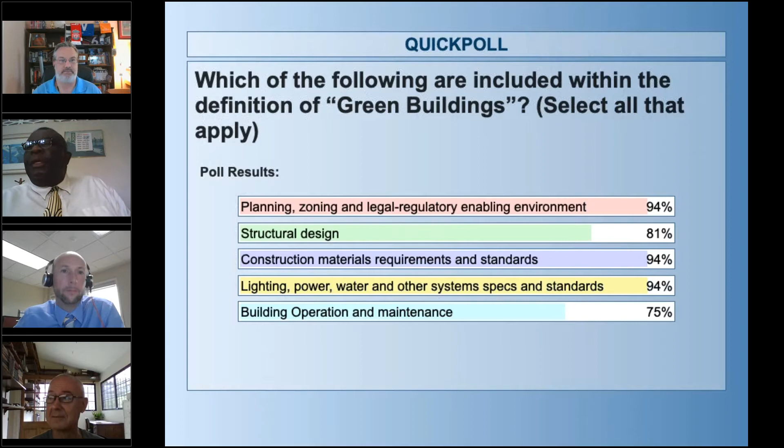Please proceed. From my perspective, I am much more at the operational level in respect to green procurement, so I am concerned with the building systems. In turning to buildings that consume energy, I'm concerned about product safety, how recyclable these products are, what are some of the end-of-life issues, and also very concerned from the perspective of a procurement officer about the concept of value for money on an overall life cycle basis.

Thank you. As I think we're seeing from a number of the speakers, we're looking at an end-to-end concept here, a full life cycle, if you will. I just want to move on to another poll before we move to a little bit more detail from the presenters, who I know are itching to get going.

I'm going to try to launch a second poll to seek some feedback from you, the audience, as to what green building public procurement might look like in your current context. Can you see it? Yes, Doug, I can see it. This is Agnes. Okay, so if I could ask the audience to give us feedback on what areas your public procurement focuses on in terms of green building procurement, if it does at present. We fully recognize that a lot of countries are still moving forward in this particular aspect, which is why this initiative was originally designed.

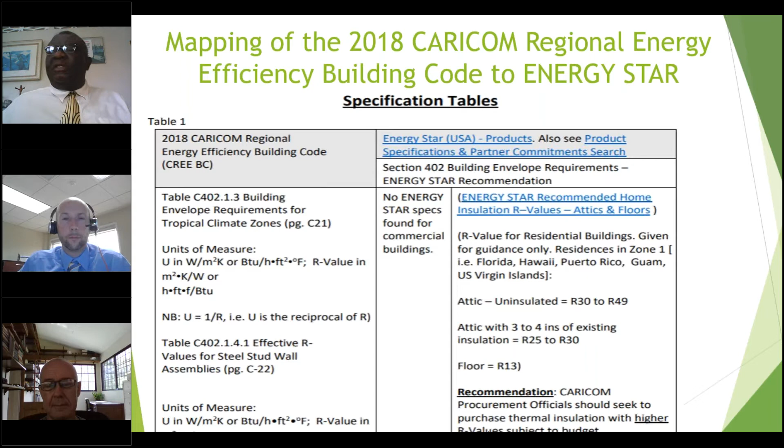In comparing with Energy Star, we found that for building envelope, there are no R-values for the commercial sector, but there are certain R-values—resistance values—for insulated and uninsulated attic spaces. We took the numbers for tropical parts: Florida, Puerto Rico, Hawaii, etc. The manual recommends that procurement officers should always go for higher and higher values, subject to considerations of budget and space.

Here's what the CARICOM Regional Energy Efficiency Building Code looks like. It was prepared by the CARICOM Regional Organization for Standards and Quality, CROSQ, together with the Code Council and ASHRAE, the American Society of Heating, Refrigerating and Air-Conditioning Engineers. After the manual was completed, CROSQ itself issued a label for CARICOM.

Accompanying the manual is a toolkit, the Green Building Procurement Manual Policy and Procedures for Public Managers. There's an overview of the national policies for procurement for 5 CARICOM countries: Antigua and Barbuda, Belize, Grenada, St. Lucia, and St. Vincent and the Grenadines.

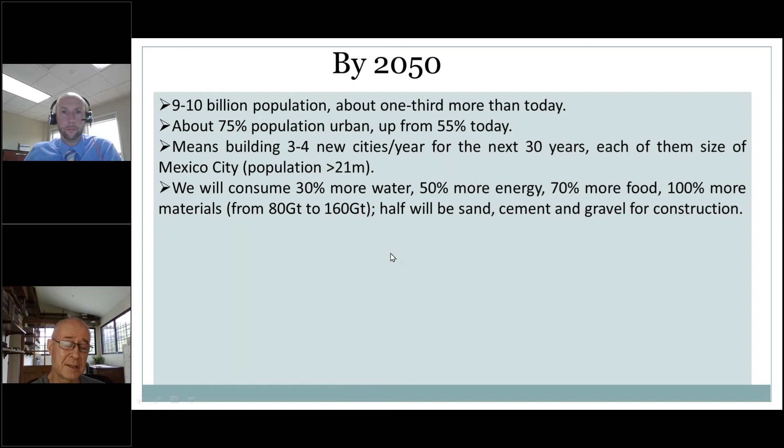As a result, by the time we get to 2050, we're projected to be consuming about 30% more water than we are now, 50% more energy, 70% more food, and 100% more materials. We'll be going up from 80 gigatons of materials a year to closer to 160 gigatons. About half of that increase will be the sand, the cement, the gravel, the steel that we need for all these new buildings.

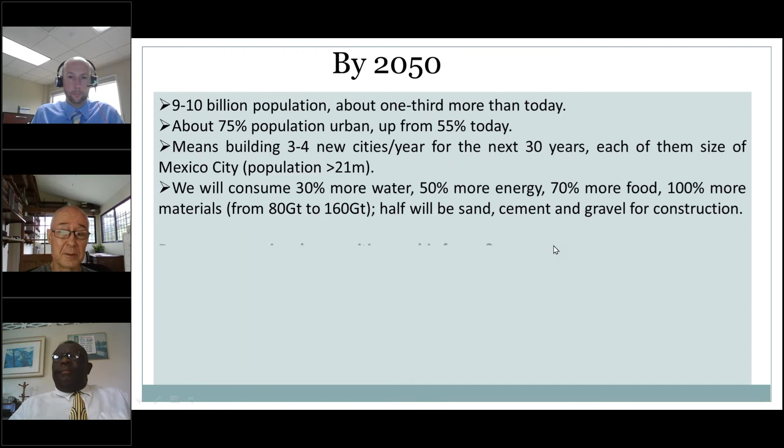Big challenges: are we going to survive the transition to this future? We have to be asking very difficult questions like, is the projected increased demand for materials actually sustainable? And of course, the major factor now, climate change. At present, most recent estimates say that we are on track to be somewhere like 3.2 degrees centigrade warmer by the end of the century.

If we continue down that road, parts of the planet's surface could become uninhabitable. About a third of the Antarctic ice sheets are potentially susceptible to collapse. Large parts of the Middle East becoming too hot and arid to survive. Significant parts of countries like Bangladesh underwater, and many of our coastal cities flooded.

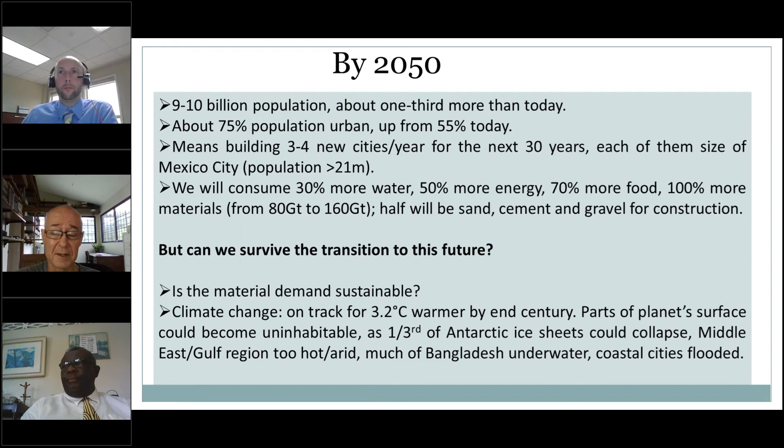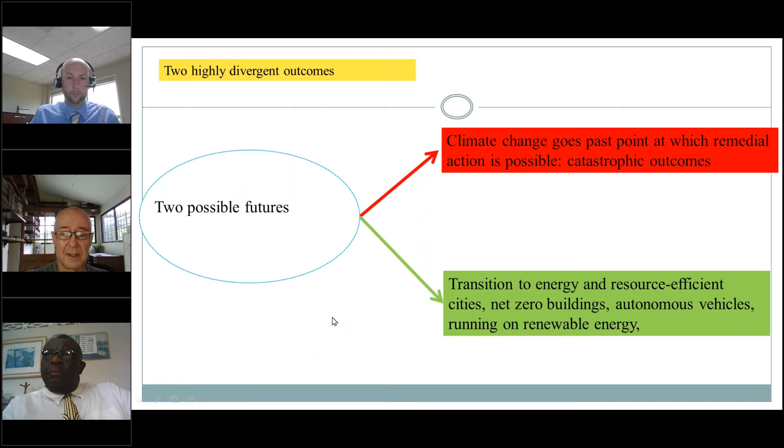So what we actually face now is 2 very highly divergent outcomes. One is we continue with the current pattern of economic development, building and so forth, in which case we probably take climate change past the point at which remedial action is possible. Alternatively, we make a decision, a transition to much more energy and resource efficient modes of urban living, including things like net zero buildings, autonomous vehicles, and a rapid transition to renewable and low carbon energy sources.

The reason why we need a particular focus on buildings is that building construction and use combined are responsible for over a third of global final energy consumption and nearly 40% of total CO2 emissions. So if we look at ways of making our buildings more efficient, both in construction and use, we can actually go a far way to solving the problems of climate change. And of course, we will end up with a built environment which is much cheaper to operate, which will give increased levels of disposable income, supporting growth in other sectors of the economy.

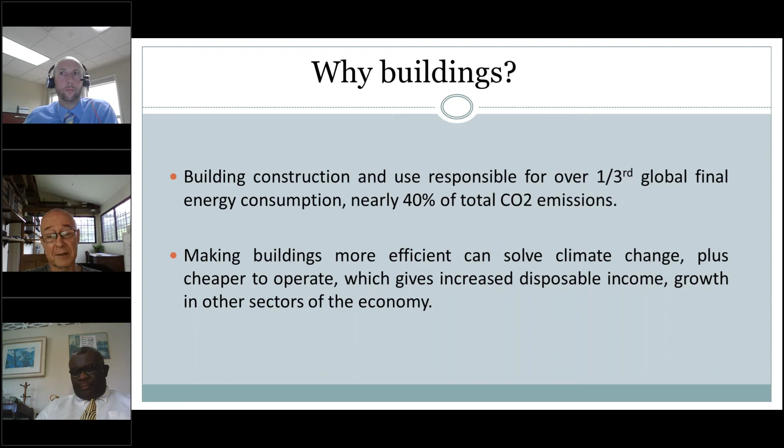So this is one of the few areas that is actually genuinely win-win. In the search for solutions, we have to focus in particular on tropical and subtropical regions, because that is where most of the population growth and urban migration will be, and where the new cities will be. This is technically challenging because it's harder to keep the interior of a building cool and dry in a hot and humid climate than it is to keep it warm in a cold climate.

So we set out to solve this problem by building a net zero energy building, which we did. It was the first in Jamaica, the first in the Caribbean, and one of the very first in the world in the tropics and subtropical regions.

A net zero energy building is one that can generate all the power that it consumes. There's also a category above that, Energy Plus, where the building generates more than it consumes, at which point the building is working for you because you're selling power to others. If we could make every building from now on net zero, we could shut down many of the world's power stations, which would take us a far way to solving our problems with climate change.

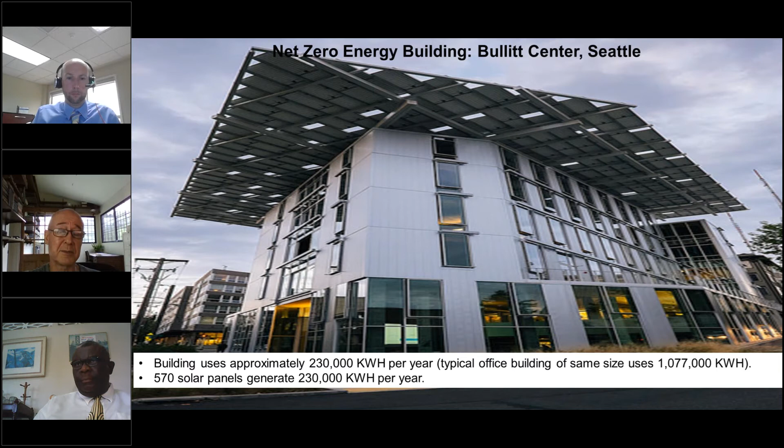We didn't invent the concept. This was an existing net zero energy building in Seattle. This building here, you see the large solar roof, is actually generating as much power as it consumes. The building is designed to be highly energy efficient so that the roof can generate as much power as the building's residual demand. This goes back now 13 years.

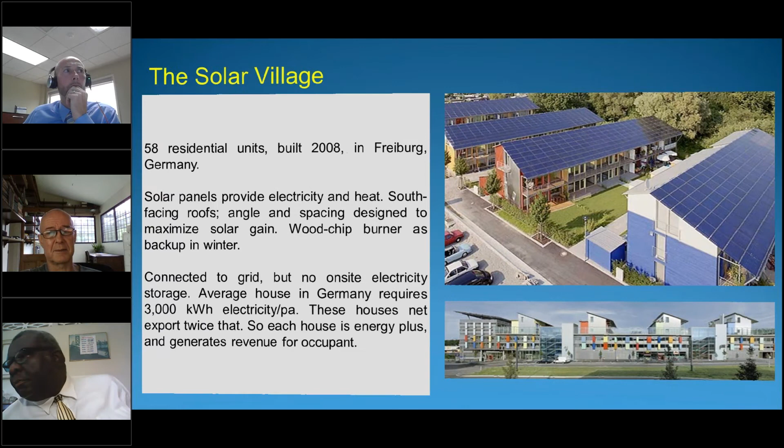This is a solar village in Freiburg, Germany. These are Energy Plus, net exporting power back to the grid. So we certainly didn't invent the concept, but like I said, this is the first in the Caribbean.

This is a net zero building designed to be highly energy efficient. Although you can't see it, the solar roof is actually generating more power than the building consumes. Now, this may change because at the moment, the COVID-19 pandemic has effectively shut down the university campus, so we can't tell for sure until we're back into normal patterns of use. But at the moment, this building is actually Energy Plus, generating more power than it consumes.

Our key findings were that some of the most effective ways to make a building more energy efficient and get closer to NZEB or Energy Plus cost little or nothing. One of the most effective things we found you can do is orient the building to the sun.

Now, almost all the development in the Caribbean at the moment puts the building parallel to the road, which means you don't take into account the gain from the sun. By orienting to the sun, you can go a far way towards reducing unwanted heat gain and improving the efficiency of the solar panels.

Second thing you can do is an internal reorganization: put the living spaces in the interior, service areas on the outside walls. Simply by rejigging the internal layout, you can keep the living spaces much cooler.

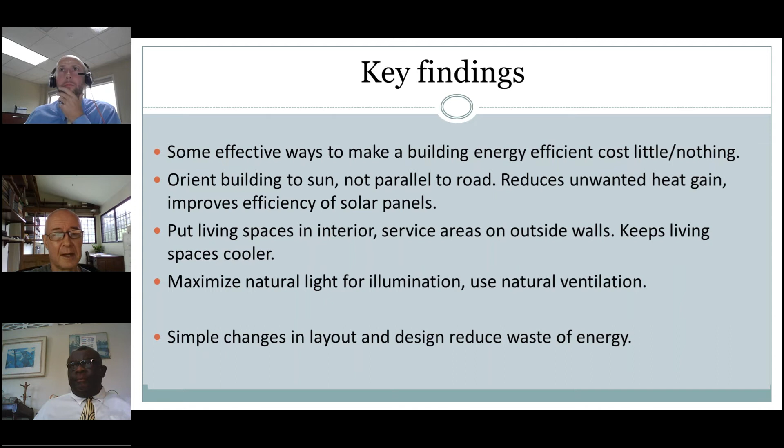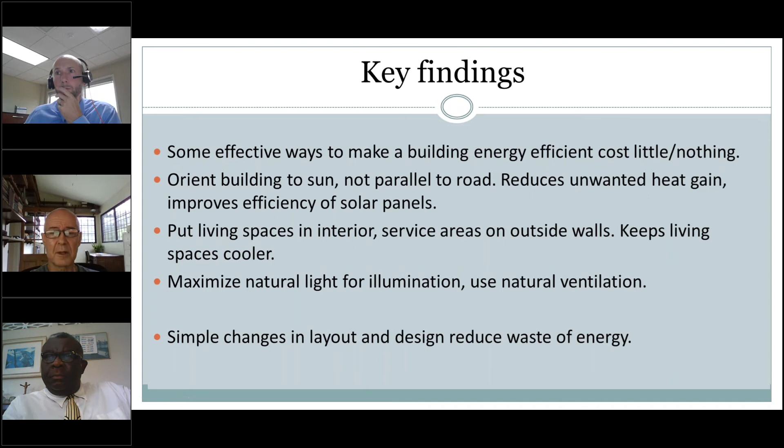And then think about building design in ways that maximize natural light for illumination and use natural ventilation. So really quite simple, zero or low cost changes in layout and design can go a far way to reducing the waste of energy. But I want to emphasize this: you cannot set out to solve just one problem at a time. This is not just an engineering issue.

You have to also take into account that every country has building regulations. These specify minimum standards, and there are very few or no government regulations aimed at net zero buildings. There are some exceptions, but none in the Caribbean.

The UK, for example, has done this. I believe some states in the US are moving towards this. So the precedent exists, but we need to see this idea incorporated into building regulations and minimum standards everywhere in the world.

The third issue is simply education. Architects and contractors do not currently know how to design and build net zero buildings. This is not a huge problem, but nonetheless it's a critical information gap, one we have to address.

The fourth issue is market demand, because if people don't know the difference, in energy terms, between a building that costs nothing to operate and a conventional building, then there won't be market demand. So you have to prime the market. The fifth issue is the fiscal system.

Taxes on imports of particular technologies make them less attractive. So it's important to persuade governments to look at our systems of taxes, to make some imports low tax or zero tax, in order to encourage this transition.

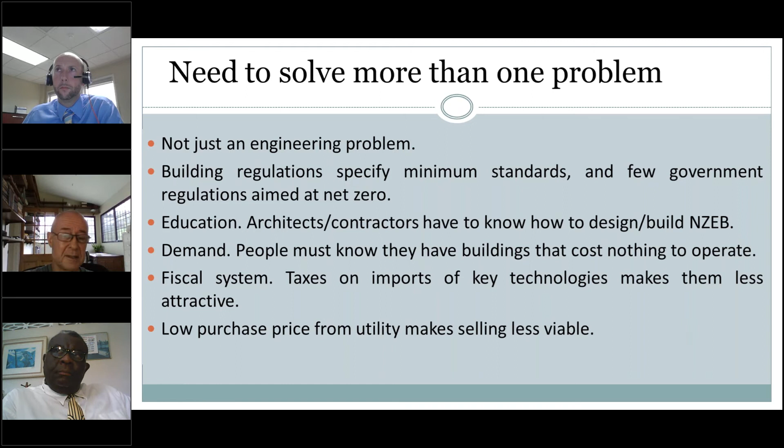Finally, the utility, the grid, plays a very important part in determining whether Energy Plus is actually economically attractive. All Caribbean countries have a monopoly grid because the islands are too small to support grid competition. If the monopoly grid offers a very low price for the electricity they're purchasing, that's a complex area we can return to in discussion. But a low purchase price makes selling power from your building much less attractive. Right now in Jamaica, the spread is large: the cost of buying from the grid is high, while the price you get for selling to the grid is extremely low. The grid is not currently very interested in encouraging this development, so this is where governments may have to play a role.

But building a net zero building in Jamaica is not the entire solution to the problem. Most construction in the Caribbean is based on cement and steel, and these industries are among the biggest contributors to carbon emissions, second only to the fossil fuel industry. This means the prevalent building type in the Caribbean has very high embodied energy or carbon cost. It also has high thermal mass and is not designed to minimize unwanted heat gain or utilize passive cooling solutions. This means most buildings in Jamaica now require constant cooling to remain at a tolerable internal temperature.

So for our next project, we would like to go on to look at building construction materials.

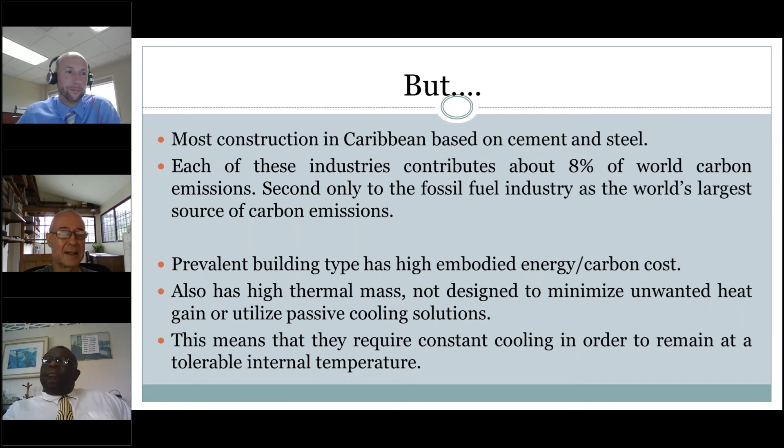Many thanks, a fascinating subject. I'd love to see the building actually, and I'm sure many of the participants would as well.

A couple of questions coming through. Given that this was a first for the region, how did you approach the market to get the necessary design, construction engineering, and contractors on board? How was that approached in terms of market engagement? And did you seek to promote innovation from the private sector, or was it more driven by design from your side?

We decided, in hindsight I think mistakenly, to follow Government of Jamaica procurement guidelines, which we found enormously onerous and time-consuming, meaning we probably ended up with a less than ideal combination. The basic idea was we went to market, put out the design specs, and asked architects to tender, then asked construction firms to tender. In hindsight, that's doing it the hard way, because a lot of the expertise you'd want to use simply isn't there, or is held by very few people. Going through open tendering is fine if you have enough competition in the marketplace; if not, it would probably be better to consider something like sole source. But we wanted to use the government procurement process because we thought it was an important principle to demonstrate that it could be achieved through a standard procedure. In some respects, though, given the current state of awareness and market conditions, it does mean you may end up with a less than ideal result.

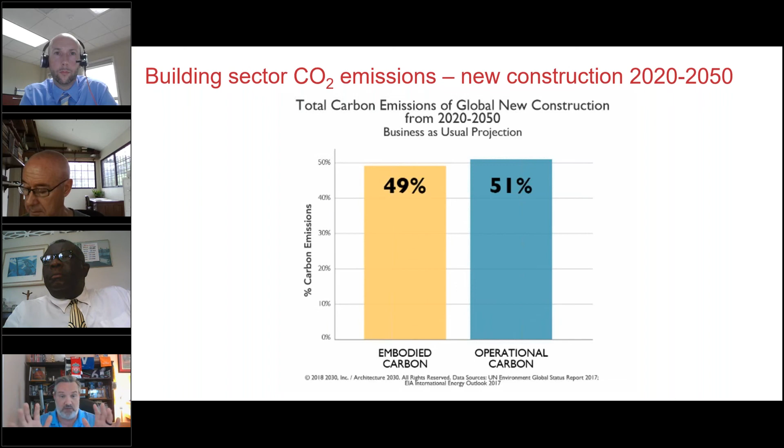Embodied carbon is how much energy it takes to produce the products we are using. Over the next 30 years, Architecture 2030 has done a study showing that almost half of our carbon impact on the environment will come from this embodied carbon. So think about it—you're building out of concrete and steel, say in the Caribbean, to account for some of the concerns Professor Clayton mentioned, very rightfully so, but those things are incredibly energy intensive to make. So we talk about things like scope 1, 2, and 3 emissions—these are all the different greenhouse gas emission areas that can come in.

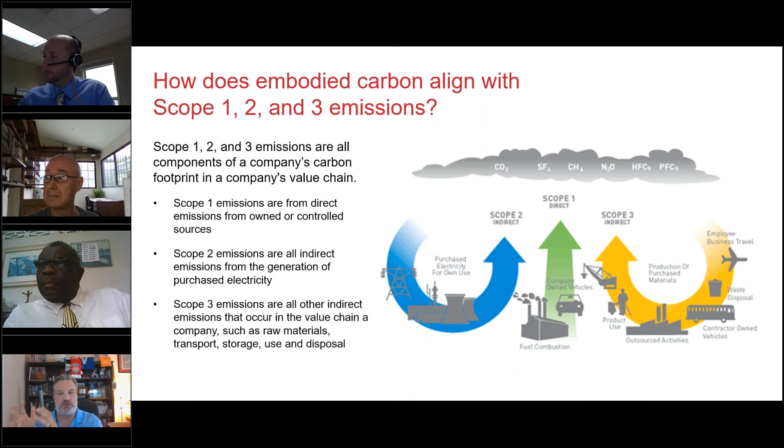Scope 1 and 2 are basically the creation by an organization. Scope 3 is that indirect emissions. A lot of organizations in the Caribbean, most of your impact isn't going to be from the energy you use, because of the wonderful trade winds that you typically have. You don't typically have the heating costs that some of the rest of us have in the world. You do have air conditioning costs, but your scope 3 purchasing is where your greenhouse gas impact really is.

So there's a couple ways you can start to get this information. As Dr. Clark mentioned, trust existing sources of information. There's something called environmental product declaration, which is exactly what it sounds like. It helps translate a product's environmental impact, including something called global warming potential, or GWP. We love our acronyms in sustainability, so please get used to them. There'll be lots of them. Email us, we'll hopefully be able to translate some of these.

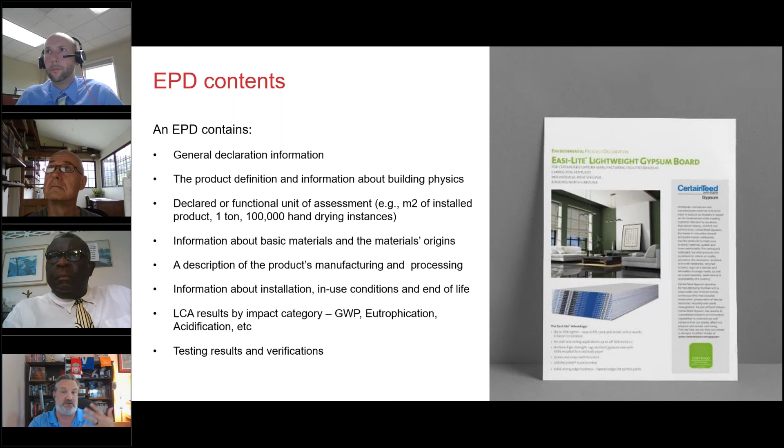This is what they look like. There are thousands of them around the world. We have some at UL that we verified for companies. Lots of different products, from steel to concrete to flooring to gypsum board to insulation, all on down the road. Look for these environmental product declarations, because they're going to tell you what impacts along the lines of their embodied impacts - that global warming potential it takes to create a sheet of gypsum board, for example, that you see here.

So they give you all of that information so you can start making choices about selecting the best embodied carbon. The other way is organizations are now starting to share and understand information across their supply chain. So certain organizations, if they don't have an environmental product declaration, ask them if they have their scope 1, 2, or 3 greenhouse gas data. Some may have that, some may have it and not want to give it to you, but push them a little bit.

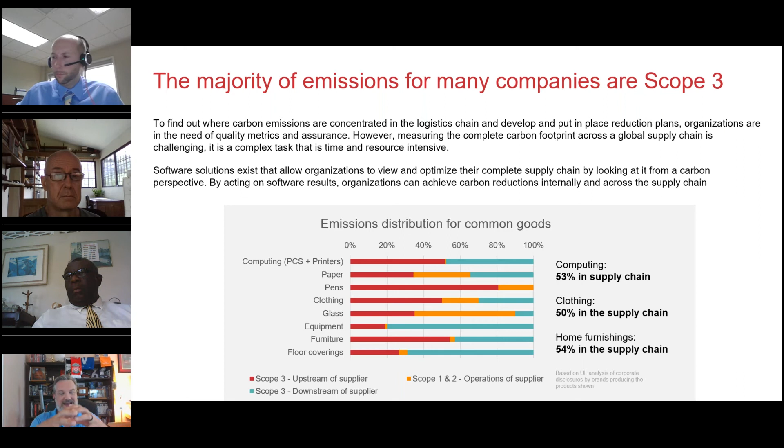One thing I like to try and remind procurement professionals about is you hold all the power because you hold the money. I understand the days it feels like Sisyphus, like you're pushing the rock up the hill every single day and it's rolling down over you at the end of the day for asking for data and people aren't giving it to you, but you hold the money. You have the money, manufacturers need the money. So therefore, keep asking for data. Ask for an environmental product declaration on building products - that'll help you get global warming potential information. Or ask if they have scope 1, 2, or 3 greenhouse gas emissions data. This can help start to give you a broad range of information where you can start to make selections.

So Doug, there's a lot more there, but obviously recognizing time, I want to make sure we get time back for questions from the audience.

Thanks, Josh. It's a very rich area for discussion, of course. Quick question. Embodied carbon, which you were speaking to, have you seen that being built into evaluation criteria and done successfully?

Yeah, in fact, the state of California now has a requirement for environmental product declarations for 4 types of products: structural steel, steel rebar, flat glass, which is windows, and mineral wool board insulation. Please don't ask me why it's that specific insulation - politics, it's a fun discussion that we can have a different day. But they got EPDs for a number of years, and now the state has set a maximum global warming potential limit on those 4 products based on EPDs. And now they will not buy products for the state of California with state of California taxpayer money that are not below those global warming potential limits. So there is starting to be a movement.

The state of New York, state of Washington, Illinois, a number of different jurisdictions in the United States are going down this, starting this process. And a little bit of a preview, now that the United States can actually say global warming and climate change again, thank you, as a governmental agency, our federal government may start to implement global warming potential, looking at it in federal procurement, which should help the entire region, obviously, hopefully.

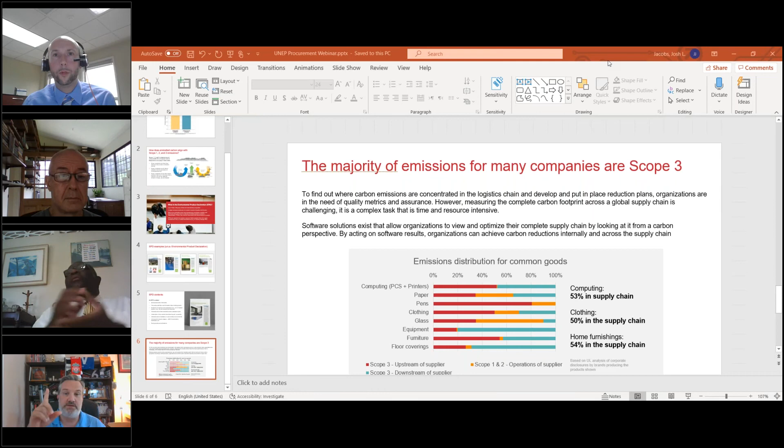Thank you, Dr. Clark. Go ahead, please, Josh. Yeah, if I may, really quickly, I'm going to put it a little bit differently than Dr. Clark. He's being very polite and giving all that information.

My way of saying it is, for procurement professionals, borrow or steal language that you trust. Go to someone else like Dr. Clark, he's giving you an entire manual. Don't feel bad about copying and pasting his work. Call Professor Clayton, ask him how he wrote this, what specs he would change. Go to the city of San Francisco or the state of California, email me. Go to Doug and ask how the Caribbean Development Bank is doing their procurement. Steal from everyone else and what they're doing to start with.

As you start to gain your information, then you can start making decisions on your own with your own data. But feel free to borrow and steal. That's what we're all here for, right? We want everyone to get better.

Thank you, Josh. And just to say, we're not shy at CDB about stealing and borrowing either. We recognize there's a whole wealth of expertise out there.

And we are going to have to conclude. There's one other question which I'm just going to ask the panel, and perhaps they could think about this and put some responses into the chat. A pertinent question as to, is there any use for the volcanic ash in terms of sustainable building? Maybe that's one the panel could ponder and put some thoughts into the chat box.

A very pertinent question, obviously, for St. Vincent at the moment. But at this point, we're really going to have to close out the panel session. I really sincerely thank the panelists. The knowledge that you brought has been fantastic, and there's been a really rich dialogue around the topics. I think this is a topic that we could take further on another day, because there's so many facets to this. So thank you again, all. If we were in a real room, I know we'd all be clapping, but certainly you have the applause from myself, and it was a fantastic session.